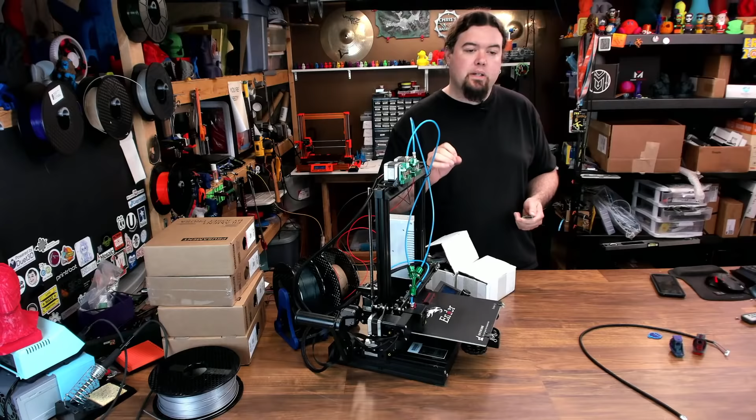So the last stream with the 3D Chameleon, we got things set up. We got two of the extruder motors set up. We got all of the tube and splitters and all that stuff, and then we tried to test print, and that's kind of where we left it.

So what I'm going to do today is recap what has happened since that live stream, show you what I changed, show you how I got it working, show you where we're at right now as far as printing goes, and then I'm going to set up the 4-color. It's pretty much going to be the same thing. Got to set up a couple more motors. We do have to move some of the switches around.

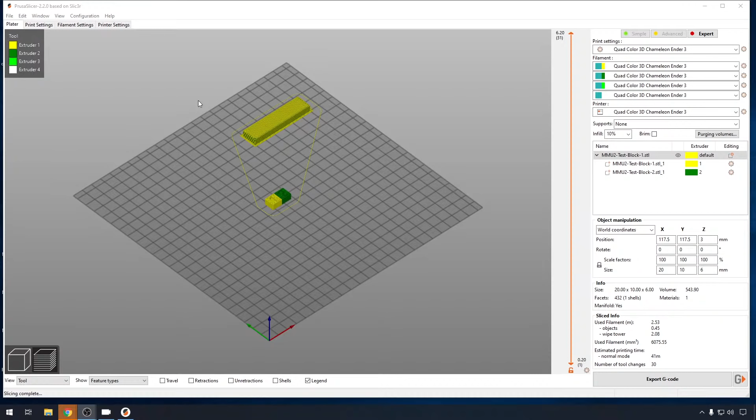Okay, so this is the test scenario that I usually set up for filament change to tune. This is just a model I grab off of Thingiverse. But for MMU, Palette, or whatever type of testing, if I want to test out the splicing or the filament tuning quickly, I'll just dump these numbered blocks in here. That way I know which extruder it is. I can see it do the wipe tower, all that good stuff. So let me just kind of break down how I came about all this. So let's take a look at one of the extruders first.

Now remember, this is a Creality printer. Creality actually uses like 12 millimeters of retraction by default, which is crazy. I usually use around 4.5 on an Ender 3, something like that, and I get pretty good results. Now with this setup, remember, I'm not just trying to keep the print from being stringy. I'm trying to keep the filament path from the model to the purge block and back, and then have to go hit the button and then come back. I'm trying to prevent stringing over a long travel period as well. So that's why I ended up with 8 millimeters of retraction. It's not just for the print. I'm trying to prevent oozing, so I don't have to use a shield. I really just don't want to use a shield.

And you'll notice I use 80 millimeters a second. If you're set to Marlin, remember you have machine limits up here. These are in effect for a Prusa machine, basically, but they will work for other machines. You might have to tweak them a bit. But I used 80 millimeters a second, and the maximum feed rate is set to 120, so I'm allowed to use that. The only other change I made from a Prusa machine to an Ender 3 is I did lower jerk down to 8 from the default of 10. It just works a little better for this printer. So I am allowed to use retraction of 80 millimeters a second.

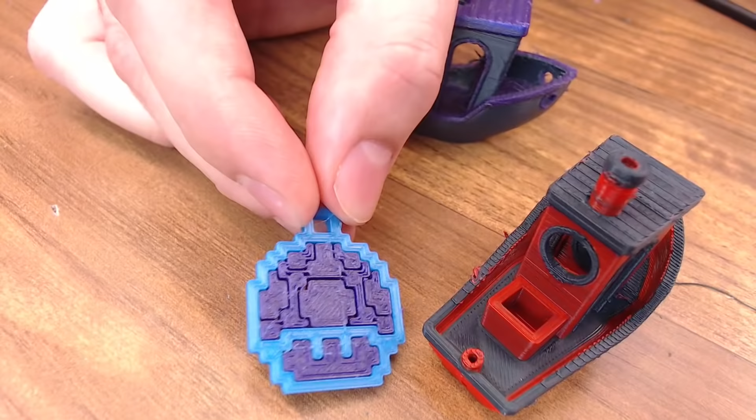Okay, so this was our first test. This is how it came out. This guy right here. Not great, but also I think that it printed on a raft, by the way. But also, I think there were some problems with that STL. There's another version of it out there that doesn't have as many gaps on it. But the print still completed, so that was no big deal. But I really didn't start seeing issues on the prints until that extruder motor started to heat up. Then I started to get a lot of clicking and such.

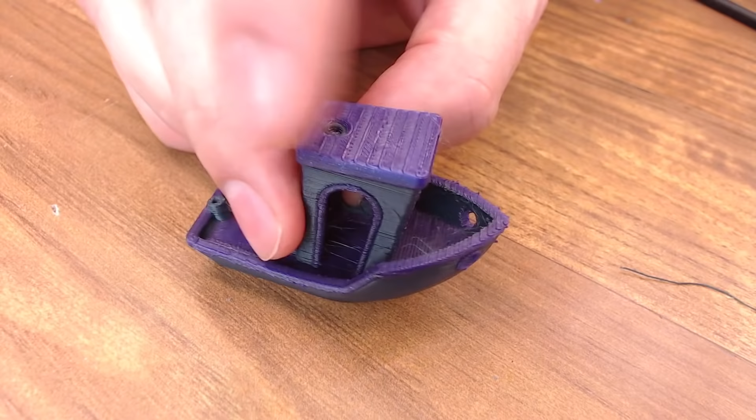And then my next most successful print was this guy right here. And the dual color Benchy is not easy for any dual color setup. There's a lot. You can see the stuff around the wheelhouse door there. That stuff is kind of hard to hit, especially to hit it accurately. So it did jam before I got to the smokestack. I had to do some more tweaking on that. But I mean, we were getting there. I did a lot of tests to get here, by the way.

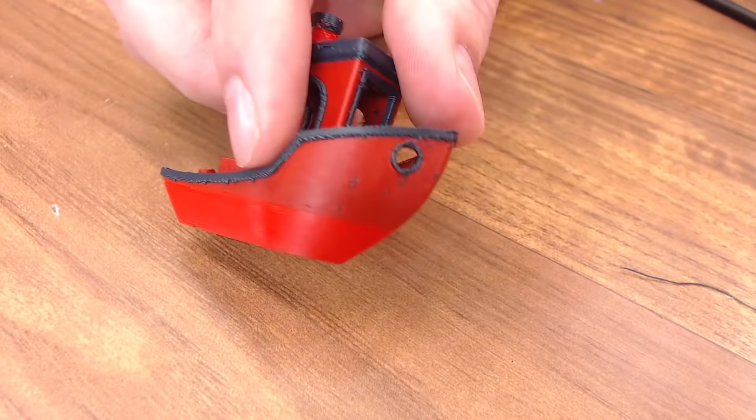And then I ended up with this guy. And I had a lot of color bleed because I shouldn't have grabbed that red color. I knew I shouldn't have done that, but I had some color bleed, and there is just a bit of oozing every now and then. And that is oozing from when it hits the button, and it's kind of based on where you have your wipe tower placed. I had the wipe tower kind of right here. So it would grab the wipe tower, start to print, and then occasionally it would kick some into the model. I have since moved it back to the default location, which is somewhere over in here, and it has improved it quite a bit.

But this is probably the best one that I've seen so far, and we've only gotten better. I have made a lot of tweaks since this one, and it's only gotten better. I haven't completed any more prints except the one that's on there right now, which is what we're going to look at next.

I should have brought some water. I'm doing a lot of talking today.

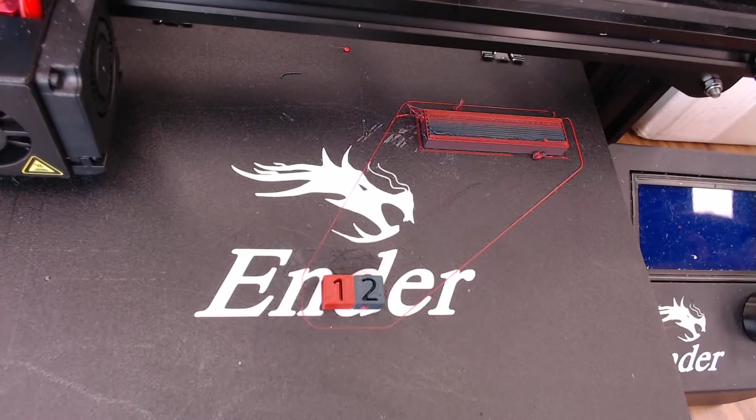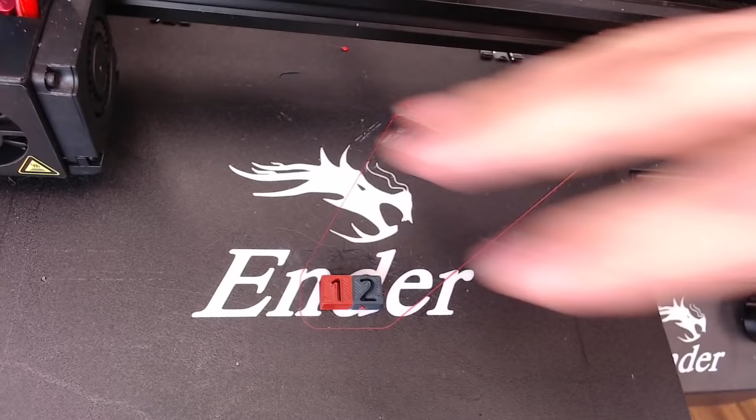So this was my last attempt. So I did mess up the wipe tower a little bit. You can see this stuff here. So when it goes over to hit the button, and then it does its sequence, it still has just a little bit of a tail, which we were talking maybe we need a bucket or a brush or something like that to keep it from doing that. I still might be able to G-code my way out of it. I haven't ruled that out yet.

But on its way back to the purge tower, whatever you want to call it, you can see them collecting there just a little bit. And that's actually the piece, when I had the tower over here, that was getting stuck in the side of the Benchy.

But after a few more tweaks after that, moving this guy around, you can see our two numbers. I do have a little piece right there, and I'm not exactly sure where that came from. I didn't watch it. And that's another thing about this. You just have to watch the thing. You have to sit here for hours and watch it print to figure out what it's doing. But these came out pretty clean. Not bad at all. So with all of that, we've seen it all.

I am ready to go to 4-color. Bring on the pain. But now that the G-code's all lined up, the PrusaSlicer config and everything like that is ready to go. It's just rinse and repeat because it's a tool change G-code. It does it every tool change. It doesn't matter whether it's 1 through 4. It should all be lined up exactly the same.

I am a bit curious because we're going to move to the left to trigger which bank we use, and then we're going to move to the right. I'm a bit curious about what the filament path is going to look like, if we need to make a few tweaks there to allow for that. We really shouldn't, but you know, things change. So there it is. That is 2-color. I've been working on it just a little bit over a week. And now we're going to go to 4-color.

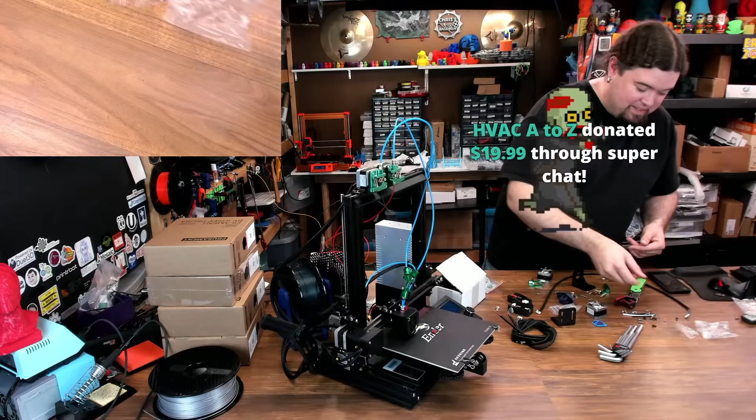And for 32 color, it might be faster to paint. I guarantee it would be faster to paint at that point. At the slow settings that I'm using, I'll just tell you for reference: with that 3.5 MVS, that 2-color benchy takes about 7.5 hours. That's something like 180 tool changes, which is kind of a lot. But just to give you an idea of what it took.

How do you know if you have high impedance? Well, I always go look up the model numbers. I don't know if there's a certain character on these. These are specific motors for this. But I always go try to find the model number and the data sheet. You're not going to see them very often on regular 3D printer setups.

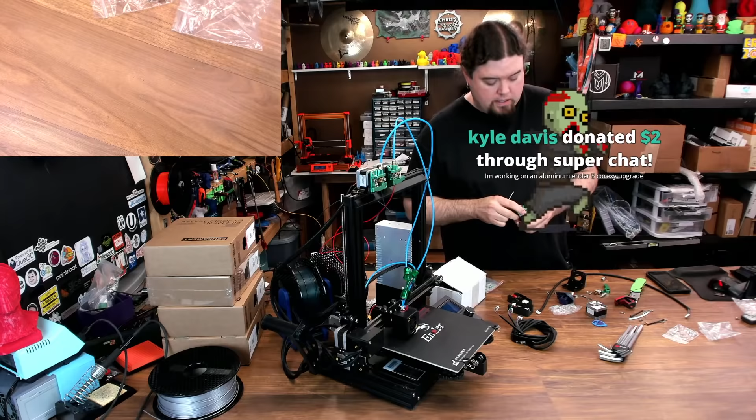That's a cool upgrade. I have been in contact with K3D. They have kits to convert Ender 3s over to Core XY. So we might actually see one of those at some point. I'd like to see a splitter for 32, no kidding.

Do I still have the Hangprinter? I do. I don't use it. I haven't used it in a long time. But it is still over there on the ceiling. It is just low enough where if I'm walking through there at the right pace, if I'm standing up nice and straight, it will clip me on the top of the head occasionally. So I do still know it's there. Yeah, it's over there.

If I had a free afternoon, I could probably get it up and running relatively quickly, I guess, if I really needed it. Because I just wound up all the anchor points and everything. I just let them wind up on the spools and just left them set there. So it should all still work theoretically. Painful reminder, yeah.

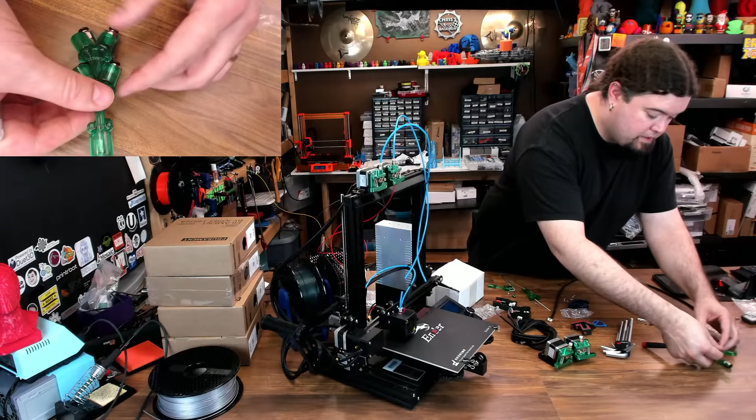So we're just going to take the couplers out of the 2, and we're going to populate the 4. I don't need one in every one. Pick a side, stick with it. Don't do them upside down. And this guy will just sandwich on here. And then we have some self-tapping screws. Put it together.

So we got 3 like that on that side, and we'll flip it over and do three the other way.

I think it's kind of funny that I get an email like 30 minutes after I go live announcing that I'm live on my own channel. I think that's kind of comical. But I guess, you know, that's a good safety measure in case somebody else is trying to be live on my channel. I'll know 30 minutes later.

Like that. 3 and 3. No, these are injection molded, it appears. They're pretty hard. I don't know if that's acrylic or what that's made of, but they are not resin printed as far as I know. Polycarbonate injection molded. Thank you. Okay, so this one is built. We can go ahead and just put that on.

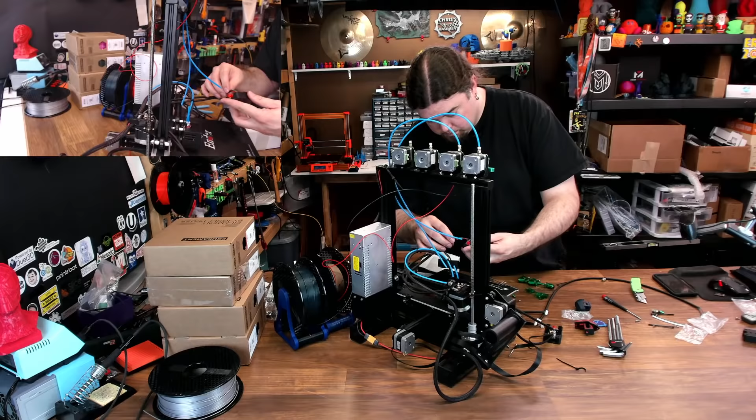So we still have the stock extruder wire coming into this switch. So then I'm going to use a straight cable. Remember, I have two flipped. I'm going to use one of the cables that are straight through. So now both of the cables that will power these other two switches will be straight through, because these two switches are going to control the motors. And then this one can go back on.

That will make things just a little bit more simple. In my mind, anyway. I guess that's really all that matters. Okay. It'd help if I got all of the wires under the zip tie.

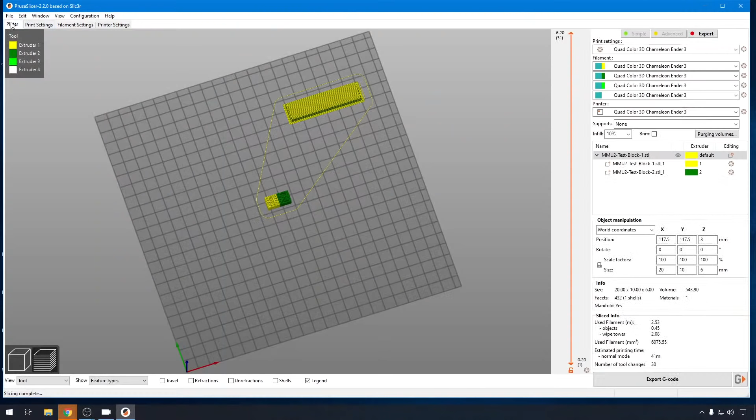All right. We are loaded, switches are on, tubes are on. I think we're ready to go. Need some juice. And for this test, I'm just going to load up the same one that I showed you with just the color squares and get this filament out of my way for a second. I don't know if you guys want to watch that, but in fact, I don't even think I extracted all four of those colors. I think I just grabbed a couple.

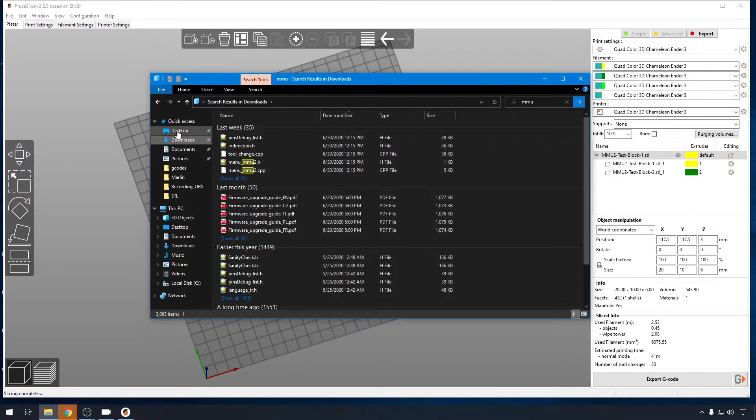Well, there's where we did the Mario one. I think it's called MMU test. It seems like I download things over and over and over. What was the MMU test block? It was all my STLs. I guess I could just throw in 4. Oh, that's why. It's because I got a Thingiverse download that was just a number and not the name. I forgot that's a... No, don't do that. No. FlashPrint gets really grabby about my files. Alright.

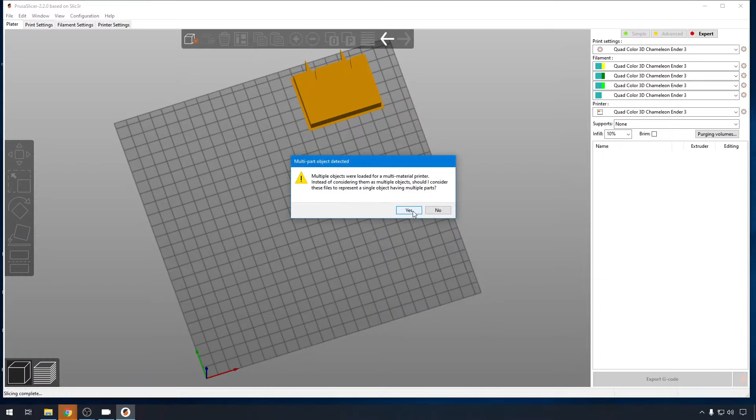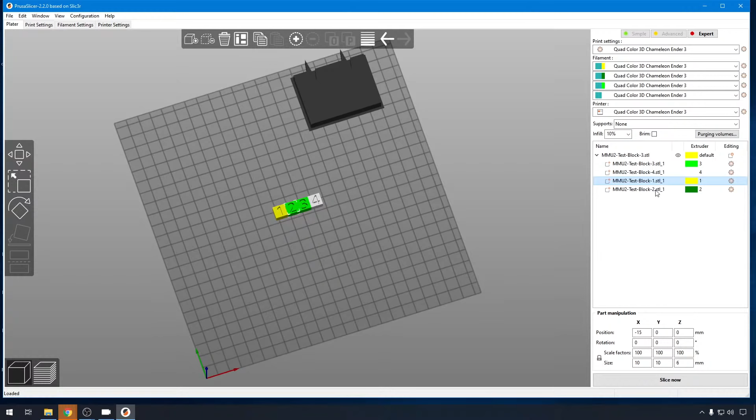Scan this. And then we'll grab these 4. Yes, please. And we should have extruder 1, 2, 3, 4. But not in the correct direction. I would like the numbers to be right. 1, 3, 4, 2. 1, 2, 3, 4. And I'm going to move this a bit. And I think we should be good. I'm going to slice it.

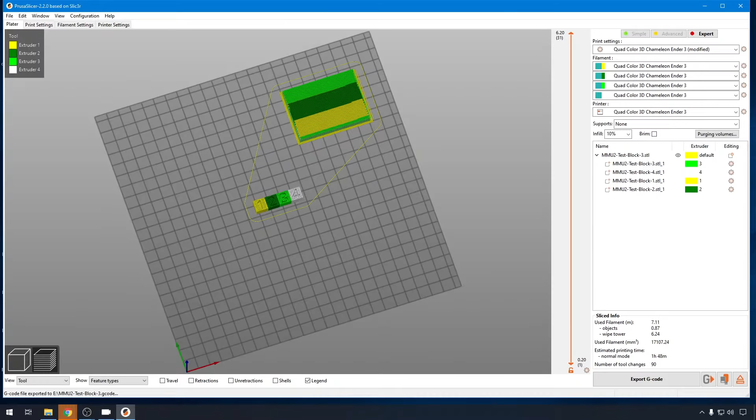I'm going to grab my SD card here. I know you can't see that. I've run into some issues with this printer dropping the serial connection. And I know it has to be something up with the board, because it does it on Octoprint, it does it on Windows. I was trying to use Octoprint to do the testing just because it's a lot easier, but I would come down here and it'd be stalled out in the middle of a print. So, yeah, I stopped doing that.

So I'm very curious to see what it's going to do. At this point, I really don't care what extruder it's going to grab on the switches. I just kind of want to see it work and see which one it picks in what way. Like what switch combination is going to make it do one thing or another. These are both out. Let's just make everything out. Everything's out all the way. So let's just see what the process is going to be for this.

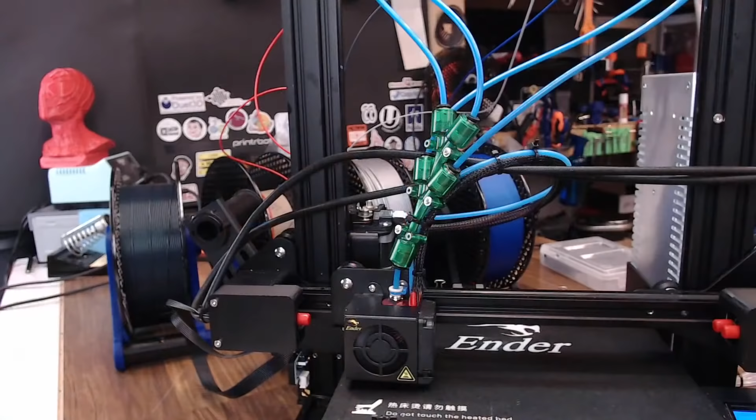All right, and what can you see? It's heating. This was the important part that we didn't get last time. I wasn't up to temp when I was trying to do the initial load sequence, so it would start at the unload sequence, and that's not going to work. But we got all that fixed up. I'm cleaning up while we're waiting for this to start.

Now, so it homed, and you're going to see it jump out 10. That's so it'll depress that switch. Now it's going to feed in. Now it's on extruder number 2, technically. But does that sequence allow it to load enough to actually get it in the extruder? We're going to find out. Because right now, I'm guessing it probably thinks it's on 1 or 0.

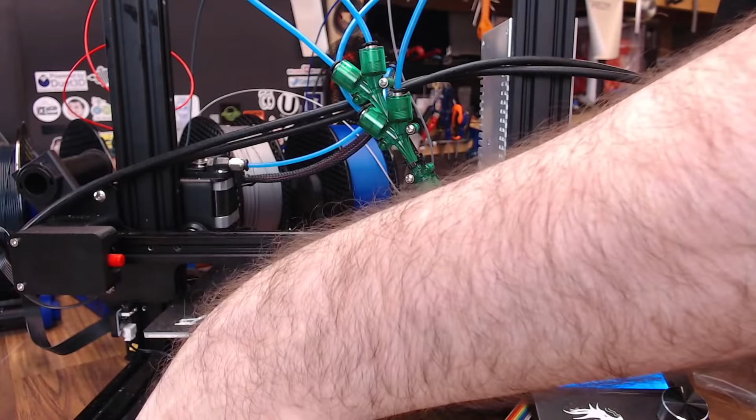So my wipe tower was far enough that it made it actually register one of these switches. So we're going to have to start in a position where it starts on the 0 bank, I believe. Because the other load sequence is going to be a lot longer, right? If you had to go through the initial load sequence, Bill, and you wanted to load 2 or 3, the top ones, that load sequence had to be a lot longer, right? Or is that 100, 155 good enough for all of them? Because that one definitely did not load that one far enough.

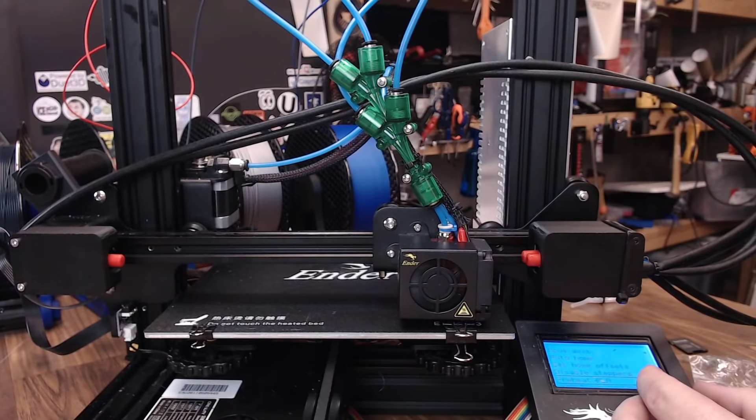250 should be good for all. Okay. Well, then we have something else amiss. I am going to move that wipe tower just a bit. Okay, so we've moved the wipe tower. Now what I'm going to do is make sure that we are on the extruder that I think it's going to be on when we start printing. So I'm going to go to control. Actually, I'm going to have to preheat again. And then we'll wait for that for a second. Start with the left button in, okay? Well, I'm going to figure out which one goes where here. Maybe that's a helpful process for people. But so I'm going to preheat.

So it went to extruder 2, the second bank, the first one, and it did the load sequence, but it wasn't near long enough to get it down to the hot end. So when it pulled it back, it was way too far out. But like I say, it might be thinking incorrectly. So here's what we're going to do. So control, motion, and oh no, I don't want to go to control. I want to go to prepare. Move axes. I'm going to do E, and I'm going to move the extruder by 10 millimeters. And which one turns? Okay, so that is.